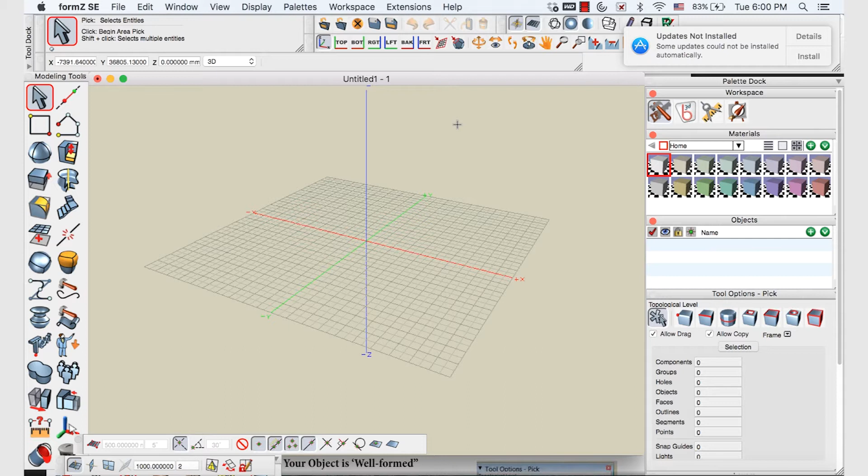Since we're creating a revolved form and we need to draw a profile, it's easiest to understand the perspective of this profile from a left or right view. So I'm going to click up here and select the left view.

To make our vase form, first of all we're going to draw a 2D vector line. As I mentioned earlier, the great thing about FormZ is that it allows you to change the style of drawing tool in the middle of drawing. So first we come over here to our drawing tools, we select the vector line, and I'm going to use a straight line for the base of our vase. So we choose the straight line tool and we click at the bottom here and draw it out for the base and maybe up a little way.

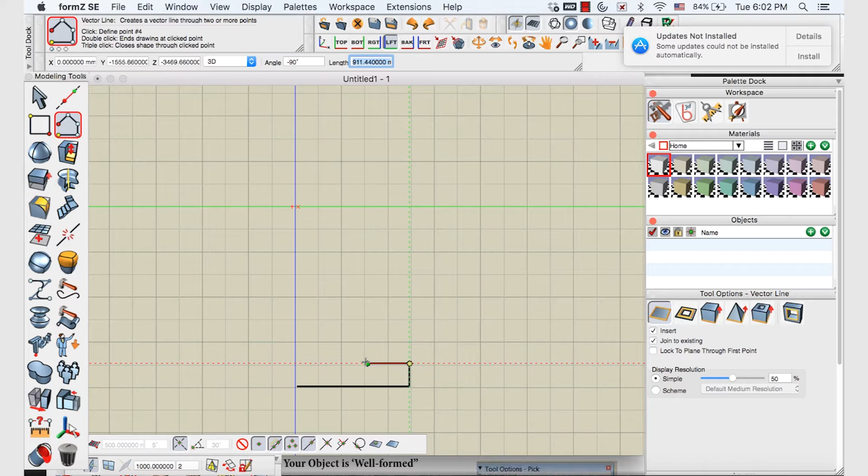Then you want to change tool to the point spline tool so that we can make a curve, and you can just click around and make the 2D perspective of a vase that you find aesthetically pleasing, and press E to end the line. I should mention that when you're drawing, make sure that your tool options are set to 2D by clicking here.

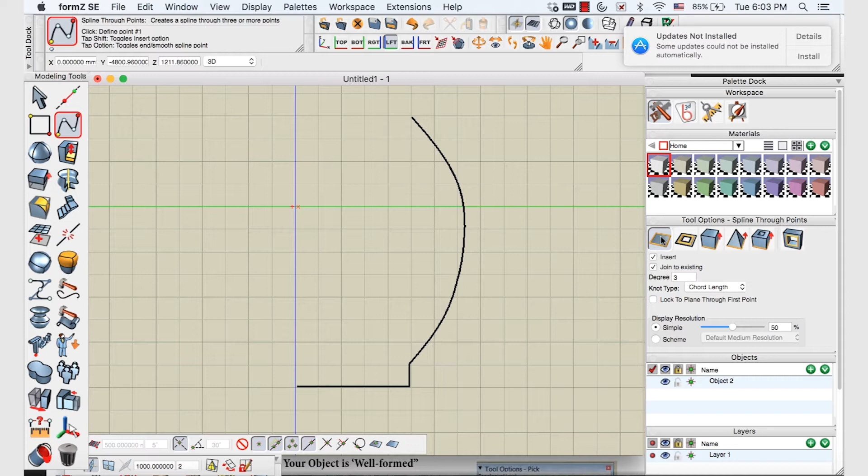You can grab the top of that toolbar and pull it out to continue using it.

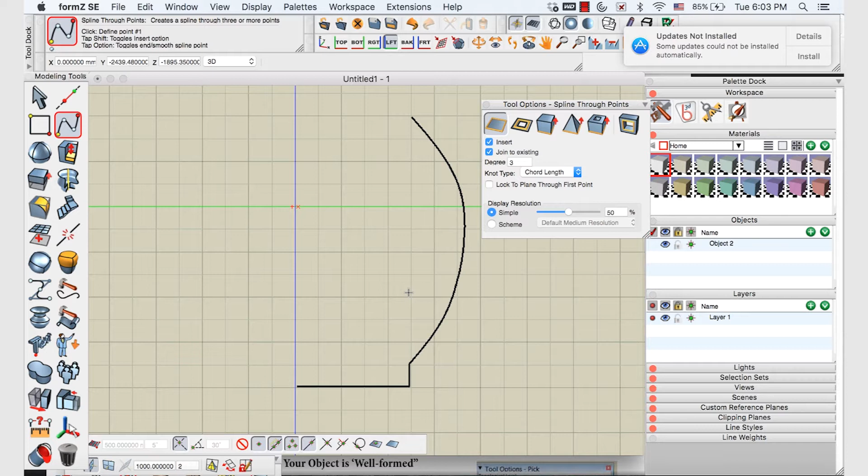Next, we need to give this line some thickness. If we were to just revolve this line, we would end up with a solid form, but we want to create a vessel. So we need to give some wall thickness to this 2D line.

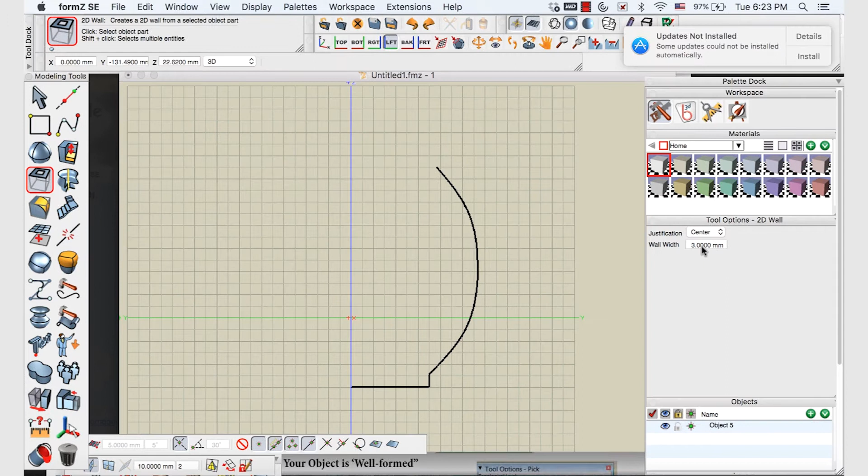In order to do that, we come over to this tool here. We select from the Derive tool, we select the 2D option, and we come over here and select a thickness, let's say 3 millimeters. We press Enter and then click on the line. Now it has some thickness.

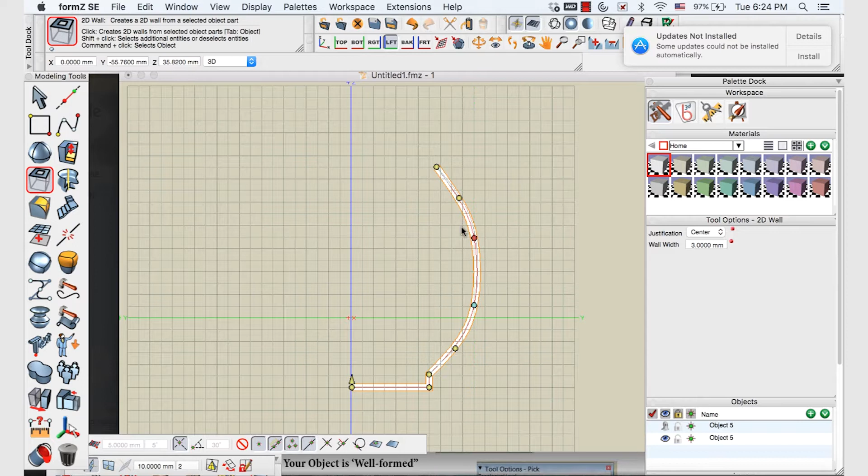You see the yellow dots that we have here? These allow you to live edit the line that you've drawn to achieve a shape that you find more desirable. At any time, if you can't find these dots on your line, you can come to the Pick tool and select the line. To evoke those dots again, we right click, scroll down to Show Controls, and there they are again. So at any time you can re-edit your line using those control points.

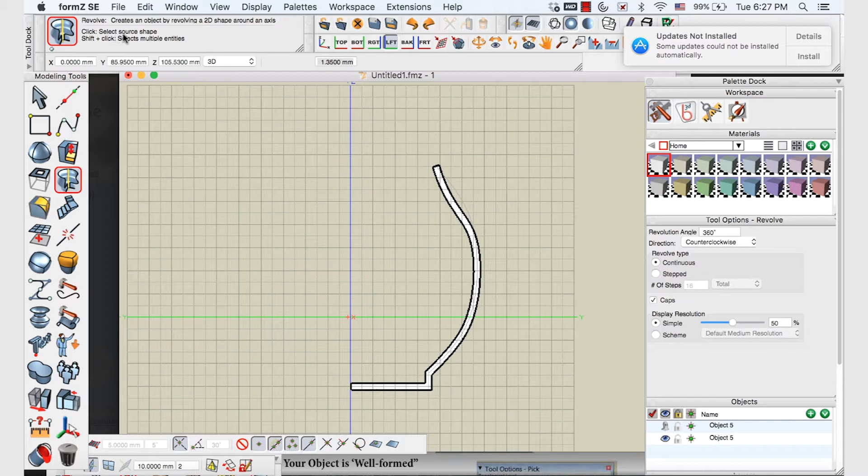Now that we have a thickened profile, we want to come over to the Derive To menu in order to revolve it. So click on Derive To and click Revolve, and then we have to look up here for instructions about what to do next. It says to select your source shape, which is our line. So we select that line, and then it asks us to select the axis of rotation, which is the Z-axis. We click that, and now we have a revolved form. In some programs this is called turning or lathing, but in this program it's called Revolve.

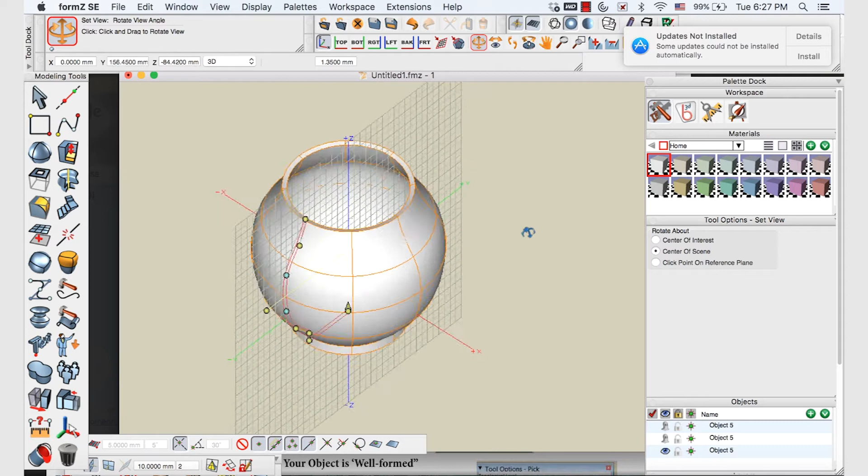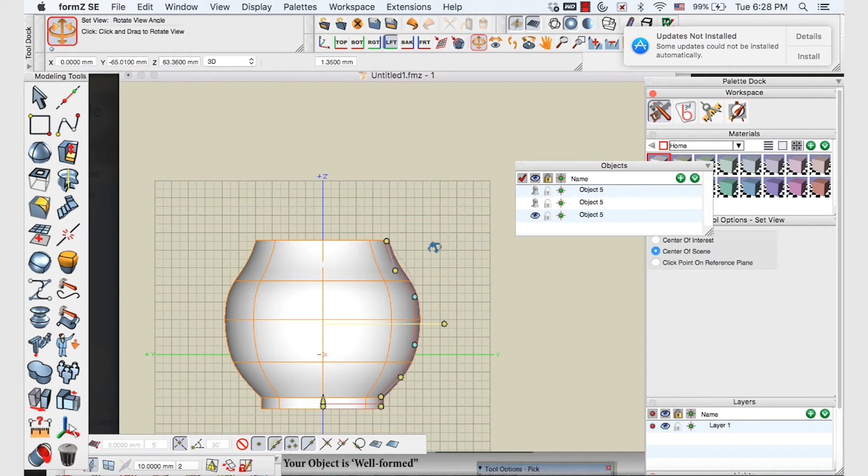So now that we have our revolved form, we can use this tool to scroll around and check it out. The key thing about this is that when you draw your 2D shape, you want to make sure that initially your line doesn't cross over the Z-axis, otherwise it won't revolve correctly. If it does, you can come over here and select your Move tool down on the bottom left-hand corner and just move it across so that it touches the blue Z-axis line but doesn't go across it.

It's good to note here that we can still access those live edit points that we had before, which allow us to move and shape the 3D object that we have now, which is pretty cool.

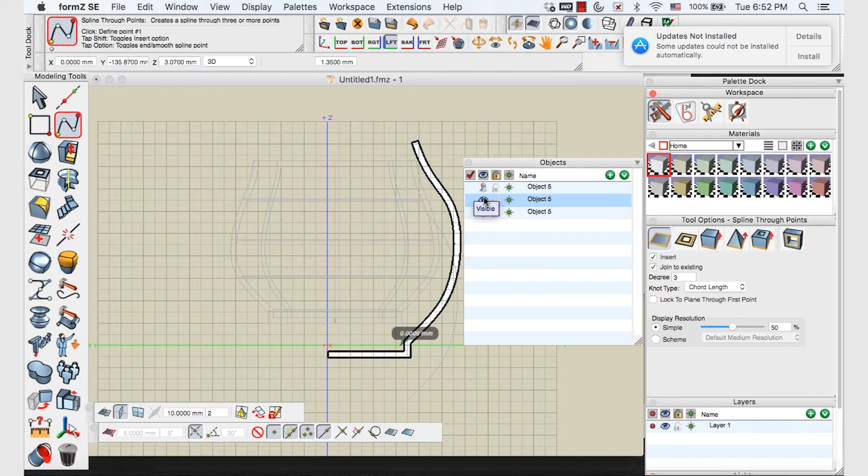So you can continue to play with those until you have a vessel shape you're really happy with. One thing I want to show you is another way to edit your 3D object, by pulling up your objects palette, reviving the ghost of our thicken line and hiding this initial object, then clicking on the ghost of our thicken line, which is the second one along there. There it is. Now we can edit that line to achieve a different 3D object.

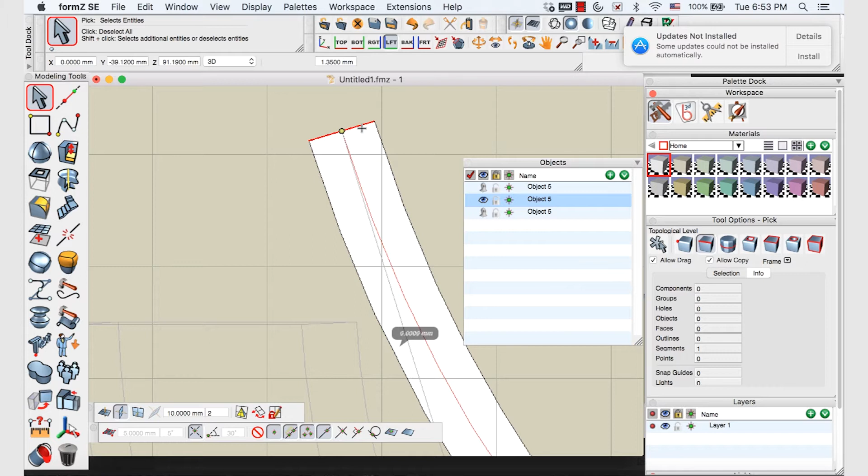Within our pick tool, from the topological levels, we can select the line segment, and I just want to select the top segment here. Our vessel ended up with a flat lip, which didn't look so good on the top, so we'll just delete that flat line.

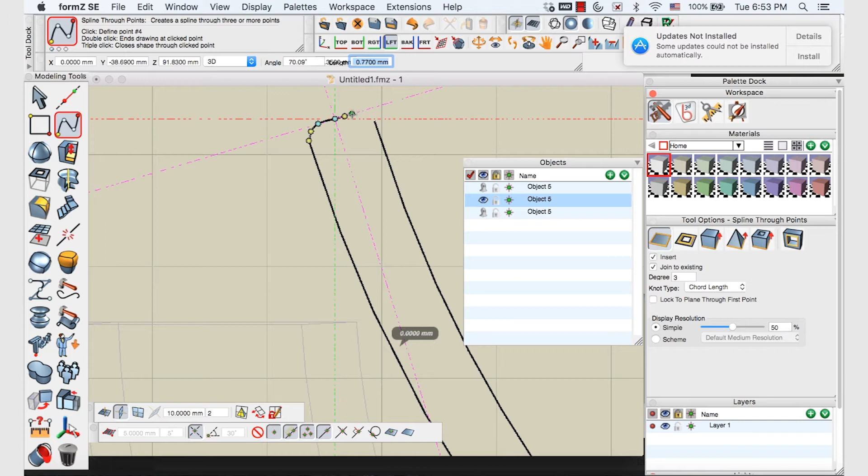Now I'm going to choose the point spline tool to draw a round line on the top here. First we connect to the last point there, and just click away along to a semicircle that we're pleased with, and connect up with the last object. You can still live edit that with the points that are there till you've got something you're happy with.

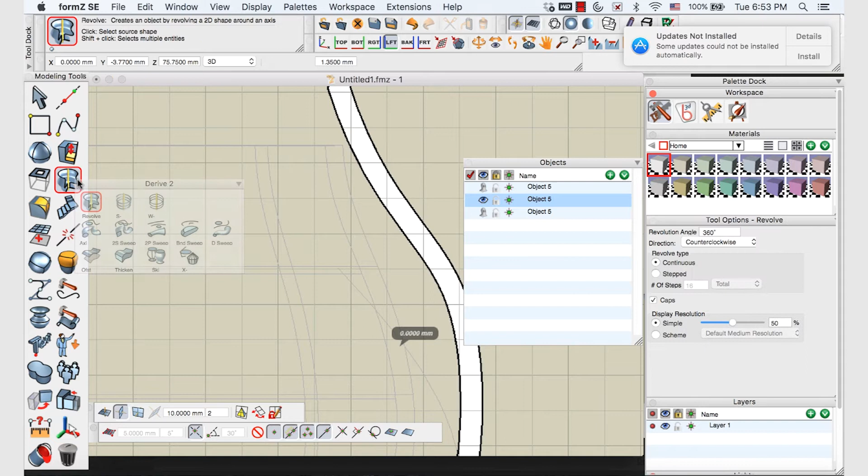Once again we can choose to now revolve that line. So we come to the derive tool, select our object and revolve, and if we toggle around you can see now it's got a nice rounded lip on the top of the vessel there, which is much more pleasing.

Now that we have our vessel, I just want to show you how the move tool works and how the active planes can influence the way the object moves or rotates in space depending on which plane you're on. So we'll drag that out there.

Within the T-form tool you can click on the perpendicular view, because if you choose parallel it's hard to tell where you are in space. So we'll choose the perpendicular tool.

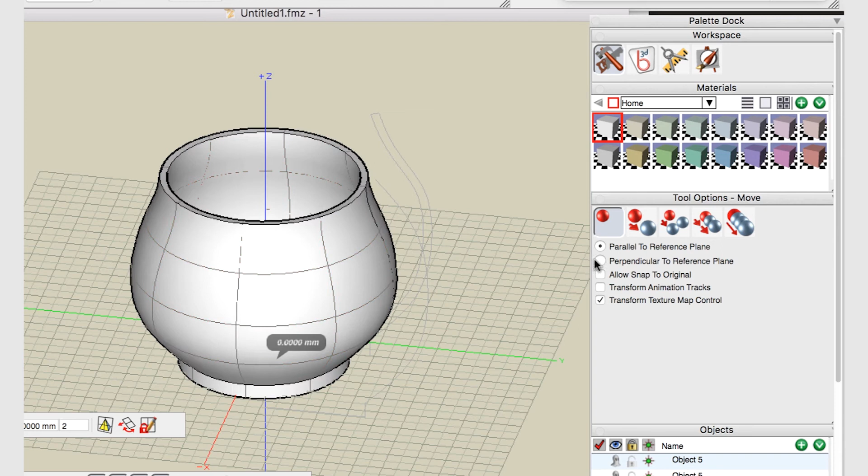If we're on the XY axis, it will only move along the Z axis. If we choose the next plane, when we're in the YZ plane, it will only move along the X axis, and the same again for the next view. If we toggle the ZX active plane, it will only move along the Y axis, like that.

Now that you've seen how the active planes influence the movement of the object, I also want to show you how they can rotate around that plane. So we select from the T-form tools, we select rotation.

Again, the instructions at the top tell you what to do. First, select the entity to rotate - that is our delightful pot. Then we define the center of rotation. Click that and drag out, and you can just rotate around that way.

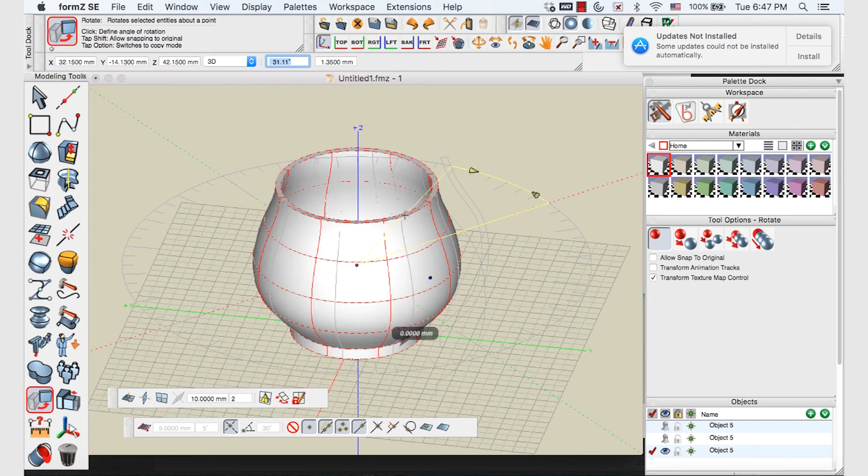You can also manually enter the amount of degrees you would like to rotate your pot. Let's say 180, click enter, and since it's a round object, it looks exactly the same.

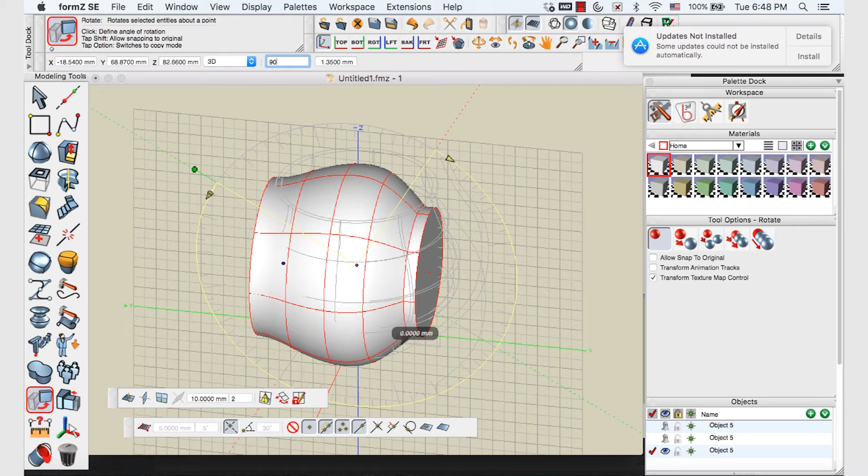However, we can select this active plane down here by selecting the center of our object, drag out the rotation, and around it goes. Let's say 90 degrees, and we select enter. Lovely. We can do the same thing again around the other active plane.

If you fancy, rotate around that guy. Same thing again, in the center, drag it out, round it goes. However, if you get stuck in an odd position like this, you can always press Command Z to go backwards.

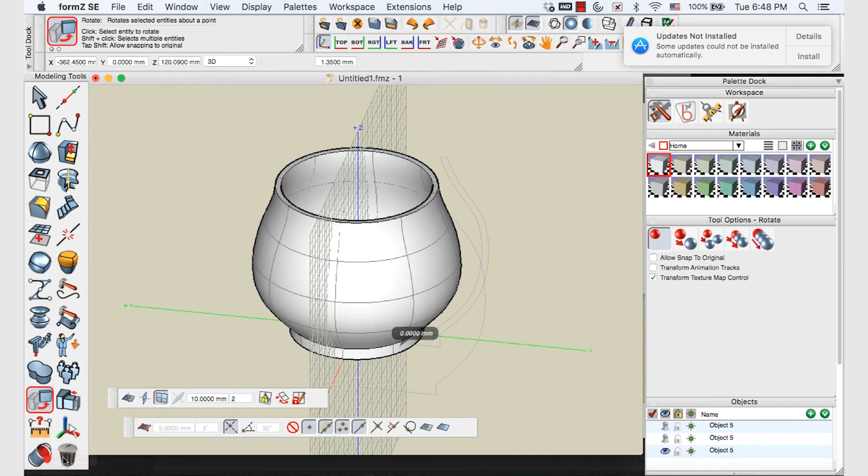If you lose your plane or lose your object somewhere far away, you can press Command F to have it fit back comfortably in the screen. If something goes wrong, you can find it again.

So 3mm is probably a good thickness for an object like this to print. It'll print really well in the 3D printer at about 3 mils. It's quite strong, and overall we want to keep our object to 80 by 80 millimeters.

To know for sure how big our object is, we can use the measuring tool, which is conveniently shaped like a ruler down here on the bottom left hand side. You click that, you want to return to a left view so you can see the object side on, and just begin at the top and drag the ruler down to the bottom, and it indicates in the middle how big it is there. So it's 97 millimeters.

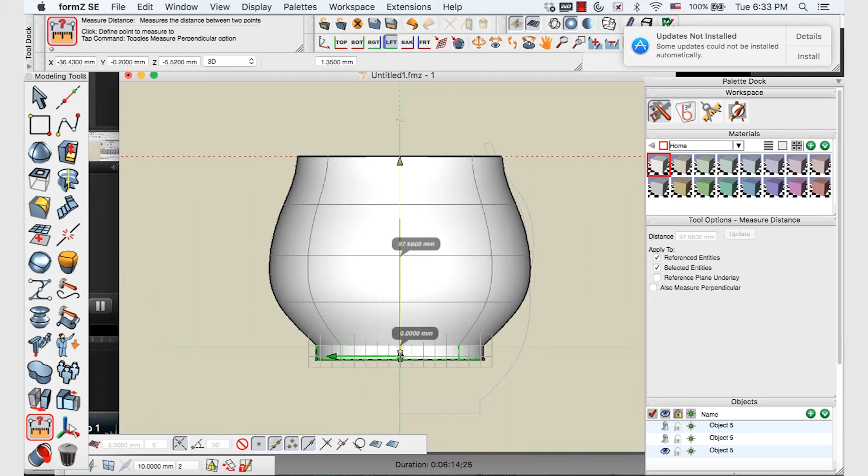Since we need it to be 80 by 80, we just want to shrink this down a little bit. So we come over here to the T-form tool, and you can select the U scale, which is short for uniform scale.

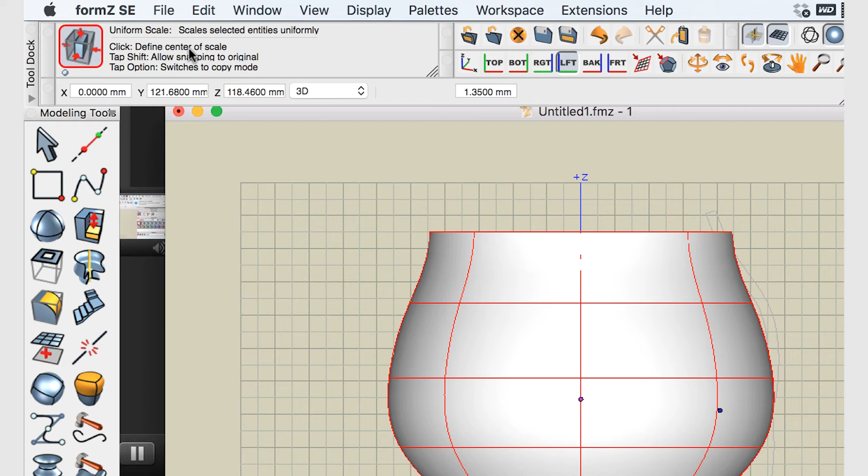Follow the instructions in the top left hand corner of the screen. It says, first of all, click the entity to scale, which is our vessel. Click in the center, and then once we've defined the center of the object, we click again outside here and drag it towards the center of the object to scale it down.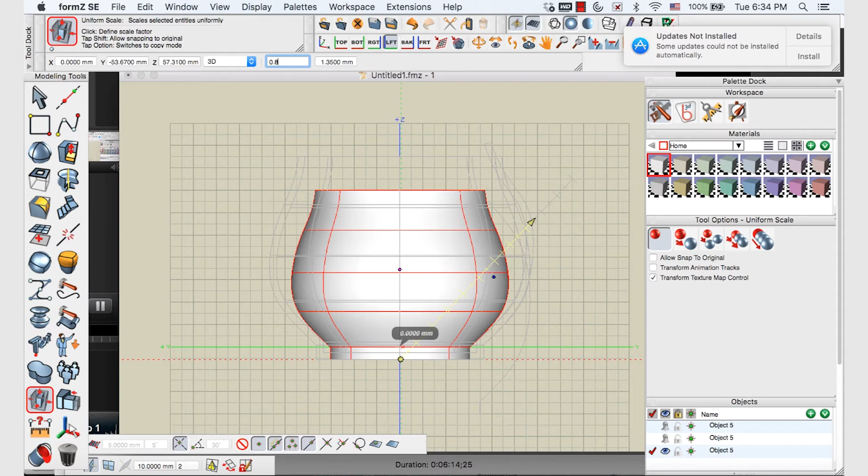You can see up top with the measurements, you can either do this manually, or you can enter them in yourself. So we enter in 0.8 mils and click enter, and it will arrive at the exact size. You can check this again with your ruler just to be sure.

Now that we have our vessel ready to 3D print, we want to make sure that the object is mathematically sound so that it will go through to the printer. So to get this ready for export, we need to turn it into an STL file, and STL is short for stereolithography file. This is a file format for 3D objects. It's very similar to, say, a PDF file, which is a very portable, very readable format along a lot of 3D programs, and is great for 3D printing.

So to get it ready for that file format, we just need to run it through a little thing here called the doctor, which is found under the measure tools. There it is, the object doctor. And it will run a test through this object to make sure that everything is ready to go.

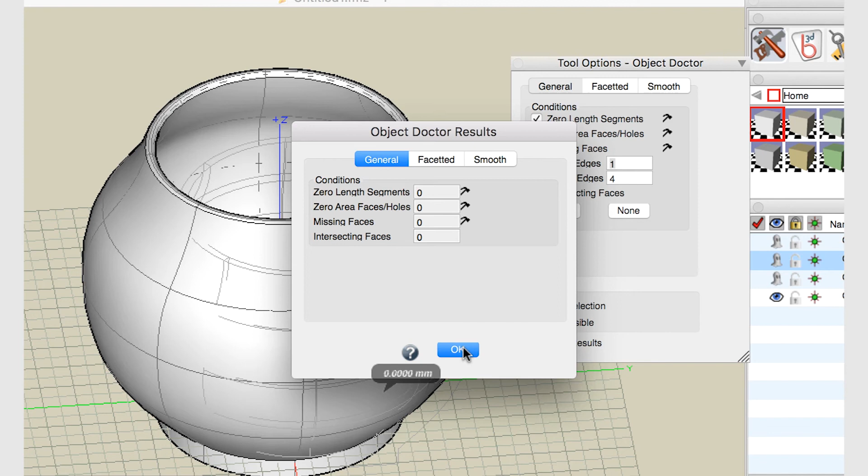Under the tool options for the object doctor, we want to select fix if possible as an action, and it will run through and try and fix any errors to make sure it's okay. So we select the object we want to doctor, and it gives you the results here. The length, segments, and faces have all come up as 0, which means that's good. It's all sound, and we click OK. Now that is a great object to print.

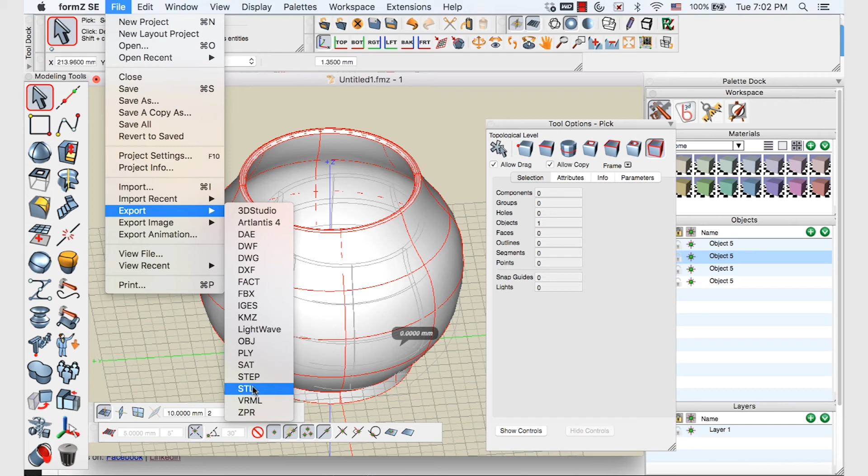So now we are ready to export. We select our object with our pick tool. If you want to make sure on tool options that we're selecting the whole object and not a segment, click that sucker, and it's all red, so we know it's selected. We come up to File and scroll down to Export, and scroll down to where you see STL, and click on that.

Now you might want to select an appropriate place to save your STL, maybe to the desktop, and you might want to make a new folder there to save your 3D STL files to. So, my 3D files, okay, create, and then we need to name our vessel. Best way to do that is to save it with your student number and your surname so that we know who to give the object back to, and we say save.

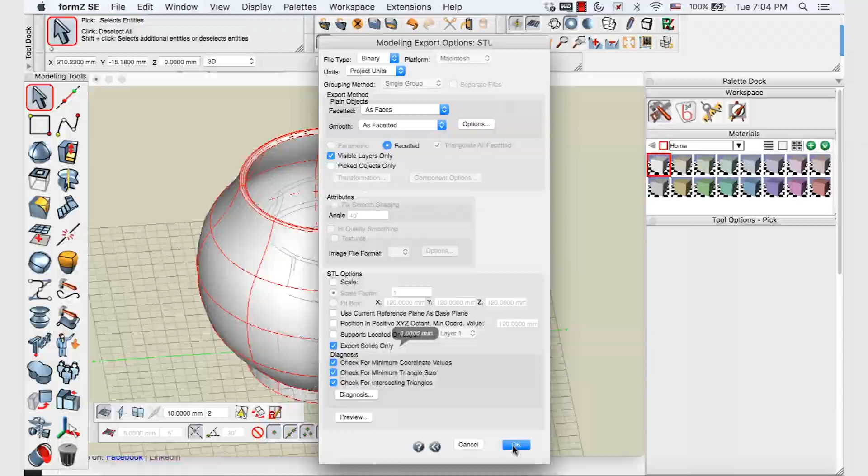It's run another couple of checks, and that's all good, and we click OK. The other thing you want to do is to save the raw FormZ file as well, because that allows you to come back in and continue to edit it and play with it. So we'll save that under your surname. You can save it in the same folder if you like, and we click save.

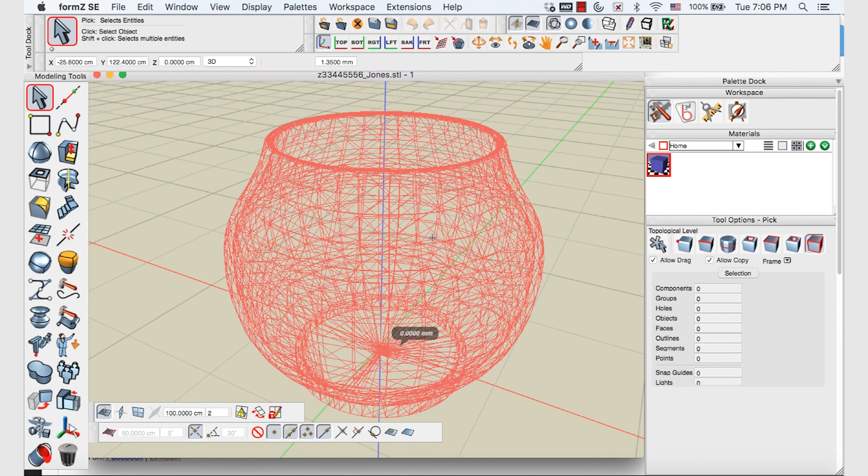Now that we have this blank canvas, we can import our STL file from before just to check that it's all good, it's all working. So we press OK, and there it is. Currently it's in the wire mesh view, but you can change the views up the top as we did in the last tutorial, to have a look. It's been divided into all of those tiny triangular segments, which means that it's ready to communicate with the 3D printer.

In the next tutorial, we'll also be looking at some more advanced operations in FormZ. These include ways to reshape, bend, and stretch different 3D objects through offsetting, pushing, and pulling. We'll also be looking at the Boolean operations, which is named after a mathematician. These include ways to union, intersect, or difference objects from one another. And you can slice them and stretch them, so we'll have a look at all of that in the next tutorial.